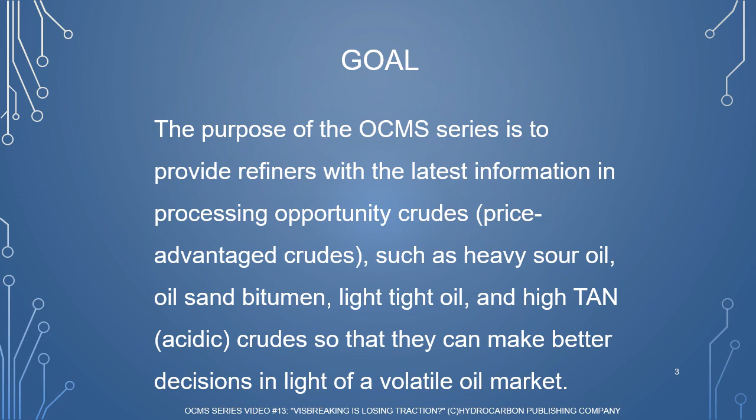Video number 13, Visbreaking is losing traction?

Video number 10, What about Bob? Bottom of the barrel, discuss the various methods to upgrade heavy residue into more desirable products. These methods include traditional means, such as solvent deasphalting or SDA, which we discussed in video number 11, coking, which we discussed in video number 12, Visbreaking, and novel conversion processes such as resid FCC or RFCC, resid hydrotreating, and resid hydrocracking. This video will focus on the Visbreaking process.

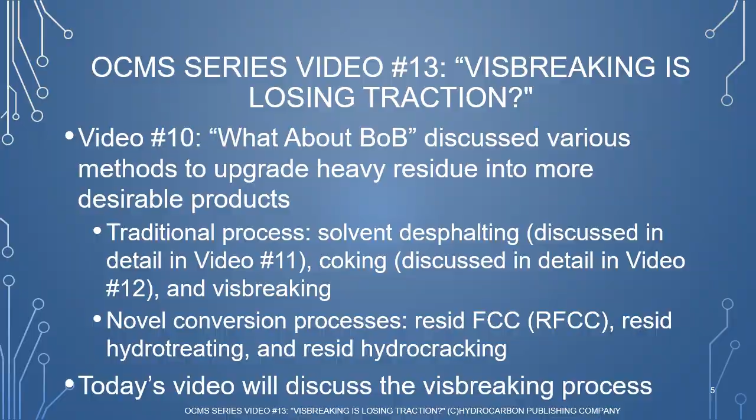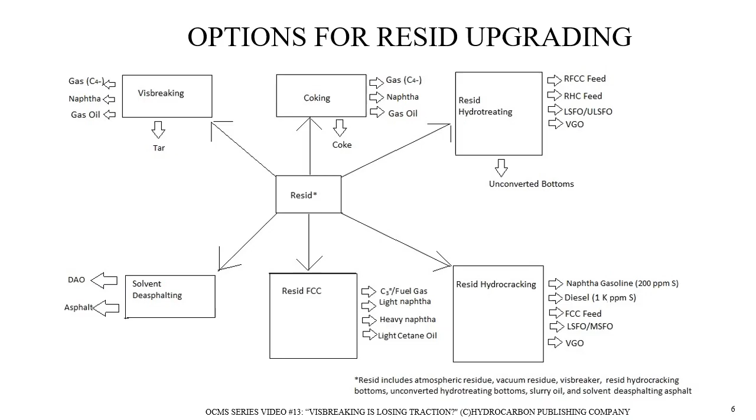This table shows the properties, particularly of the resid fraction, for a number of heavy crude grades from around the world that have API gravities from 10 to 26 degrees. In comparison, conventional crudes such as benchmark Brent of 37 to 39 degrees API and 0.35 to 0.45% sulfur, and West Texas Intermediate or WTI of 39.1 degrees API and 0.6% sulfur, have only 9 to 11 volume percent and 6 volume percent of resid respectively.

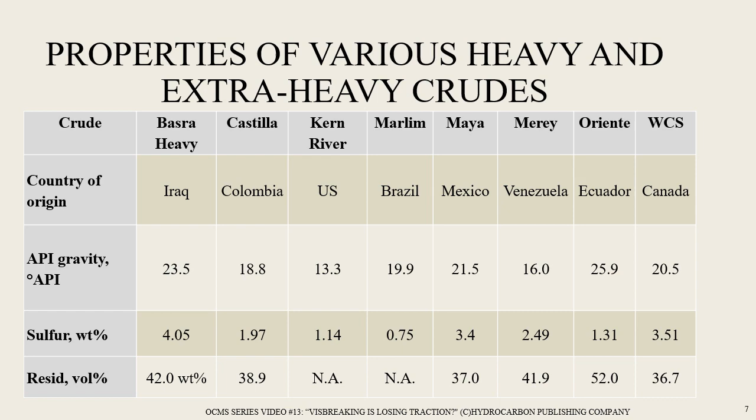Recent and upcoming mandates have led to a decrease in the demand for heavy fuel oil. The International Maritime Organization's or IMO 0.1% spec for sulfur for fuel used in ocean-going vessels traveling through dedicated emissions-controlled areas has reduced the demand for 1% sulfur fuel oil to the point where the remaining material is simply blended in with the high-sulfur 3.5% bunker pool.

Demand is expected to decrease further when the IMO enacts a 0.5% sulfur content spec in 2020. According to the Executive Vice President for Italian Oil and Gas Group ENI, refiners have two options: either buy low-sulfur feedstock or invest in technologies to convert bottoms into acceptable fuels.

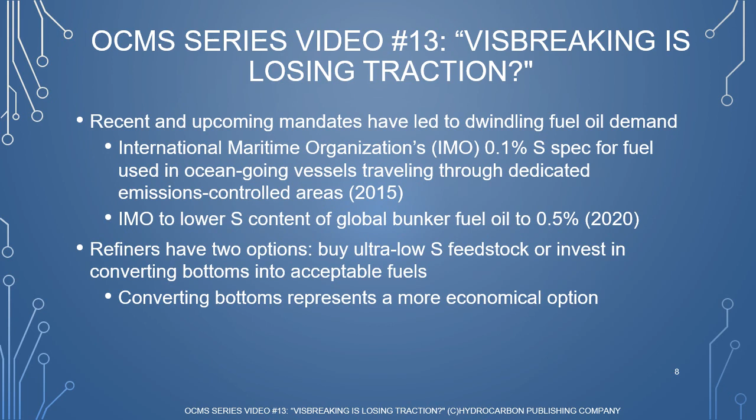The conversion of bottoms is a more economical option, and there are a number of methods to do this. Visbreaking is one of these methods. While Visbreaking is not a popular method nowadays to upgrade bottoms, it does have advantages over other methods.

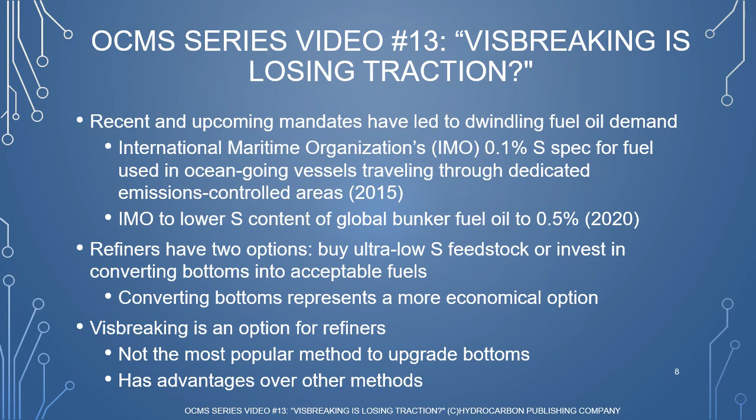This video will discuss Visbreaking in 5 sections. We will first discuss recent news involving Visbreaker additions and trends in global Visbreaker capacity. The video will then discuss some licensed Visbreaker technologies and some commercial additives and fouling control methods for Visbreakers. The section Plant Operational Experiences with Visbreakers will discuss the benefits of online cleaning to remediate problems, namely fouling and coking, that occur in Visbreaker units. The conclusion will recap the topics of the video and discuss a new potential future use of Visbreakers beyond the refinery.

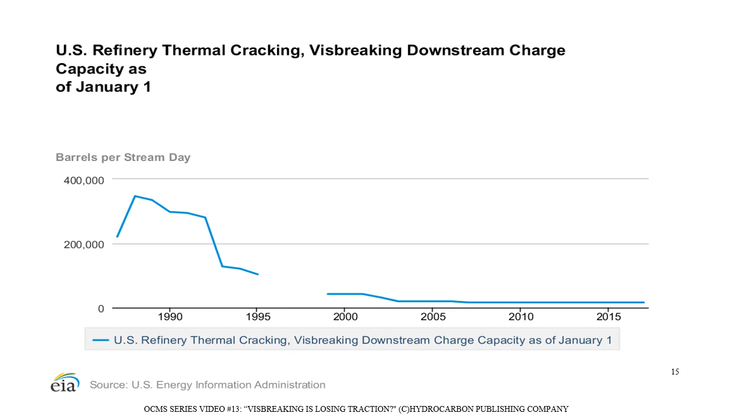In 2018, Polish refiner PKN Orlen announced plans to build a new visbreaking unit at its 330,000 barrel per day Plock refinery. PKN Orlen said the new visbreaker will boost distillates output by 1.2 thousand metric tons per day, or 9,000 barrels per day, while reducing high sulfur fuel oil output. The new unit is expected to be online by the end of 2020, which would help the refiner comply with the International Maritime Organization's new sulfur spec.

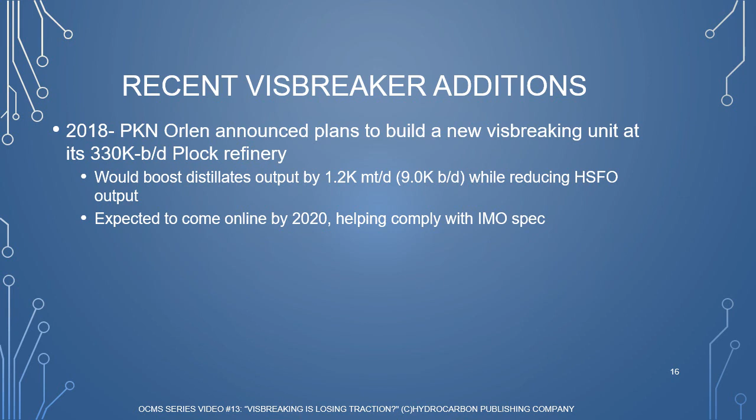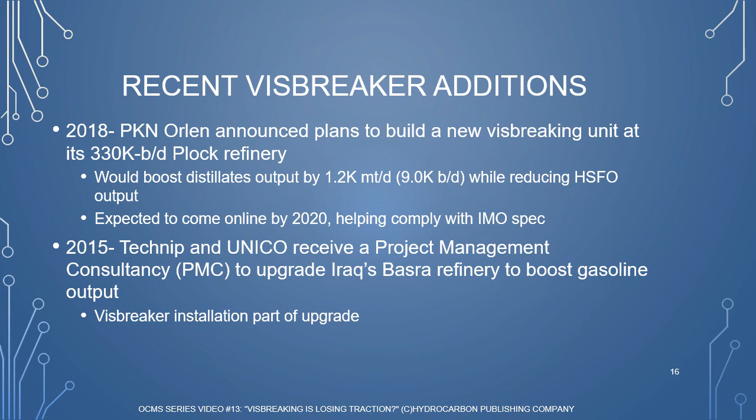In 2015, Paris-based Technip and Japanese engineering consultancy UNICO received a project management consultancy to upgrade Iraq's Basra refinery to boost gasoline output. Part of the upgrade includes visbreaker installation. Also in 2015, Russian Rosneft installed visbreaker capacity in its Kuybyshevsky refinery.

According to OPEC's World Oil Outlook 2017, over 11 million barrels per day of secondary refinery unit capacity, which includes visbreaking, will be added around the globe from 2017 to 2022. Most of this new capacity will be centered in Asia Pacific, the Middle East, and Russia, where growing demand and the introduction of tighter fuel standards are driving investments in secondary unit capacity. Over 1 million barrels per day of coking and visbreaking capacity will also be added, with the new IMO spec also being the main driver.

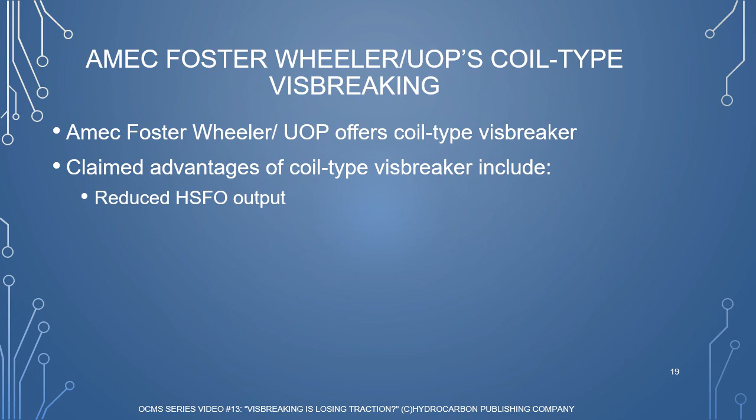Amec Foster Wheeler UOP offers its coil-type visbreaking process. Their coil-type visbreaker has been claimed to have the following advantages: reduced high-sulfur fuel oil output, a reduction in distillate cutter stock requirements which makes the distillate available for sale as more valuable transportation fuels, a low cost to upgrade, and simpler maintenance and decoking compared to soaker visbreaker designs.

These coil-type visbreakers can be integrated with vacuum units to eliminate redundant equipment and reduce installation costs. This type of integration was evaluated for a Russian refinery designed to operate a new vacuum unit along with a visbreaking unit.

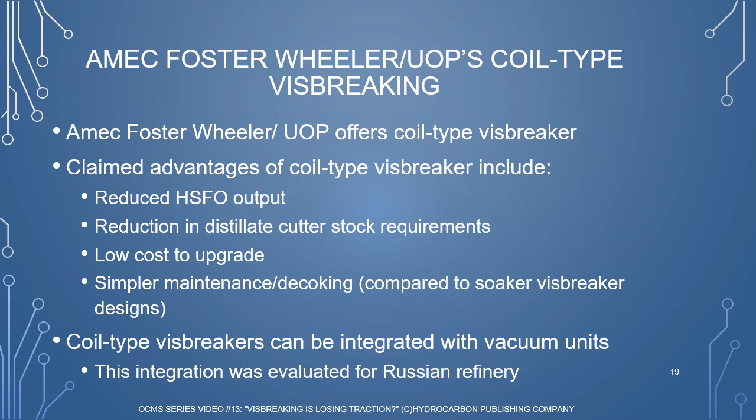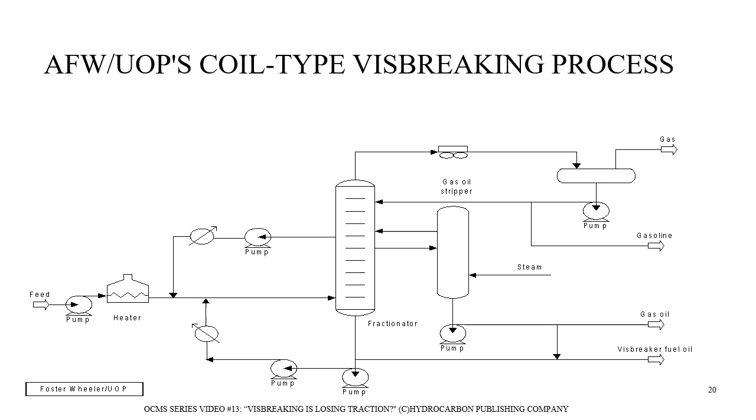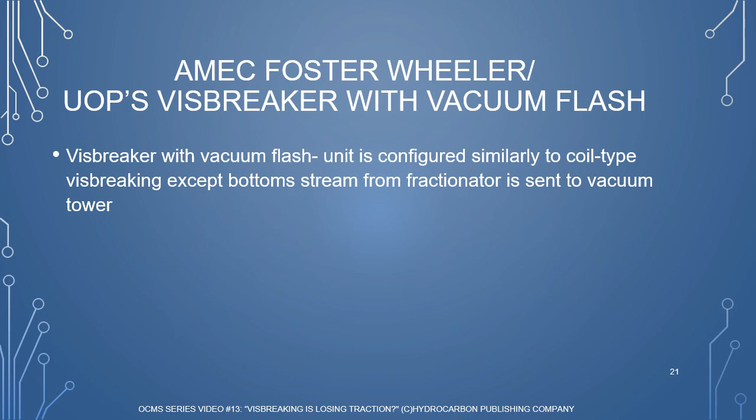Amec Foster Wheeler UOP also offers visbreaker with vacuum flash. In this option, the visbreaking unit is configured in the same way as the basic coil visbreaker, except that the bottom stream from the fractionator is sent to a vacuum tower. The liquid that exits from the bottom of this tower is steam stripped, while the vapor overhead is partially condensed into distillate products that can be processed to transportation fuels.

Heavy vacuum gas oil and light vacuum gas oil side streams are removed from the column and combined. Part of the combined vacuum gas oil product is used for fuel oil viscosity reduction, while the remaining portion is utilized as cracker feedstock.

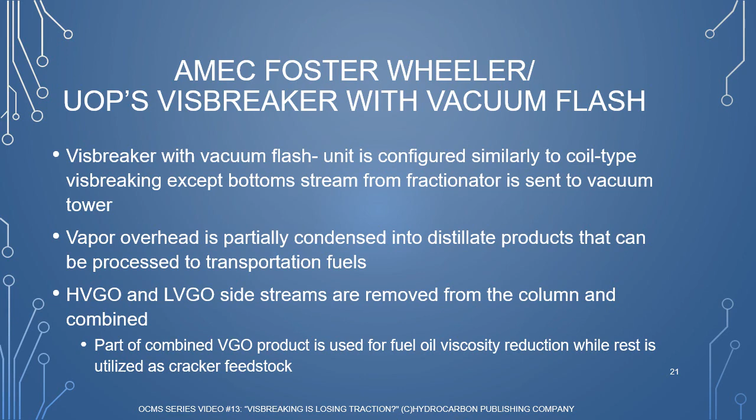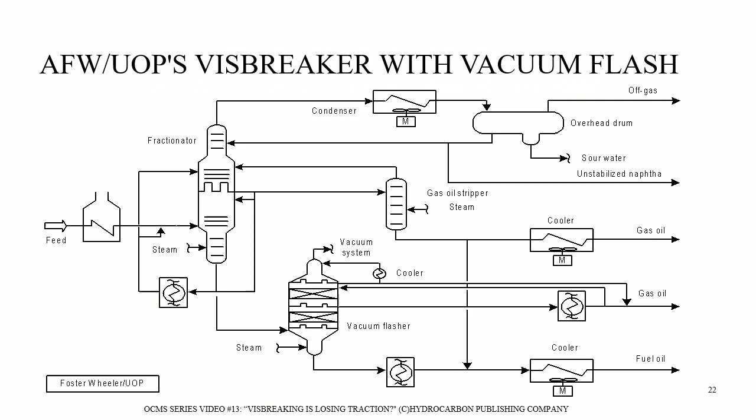This process diagram depicts Amec Foster Wheeler UOP's Visbreaker with vacuum flash. Amec Foster Wheeler UOP's two-stage Visbreaker is similar to the Visbreaker with vacuum flash, except that the combined gas-oil stream is sent to a thermal cracker before being routed back to the fractionator.

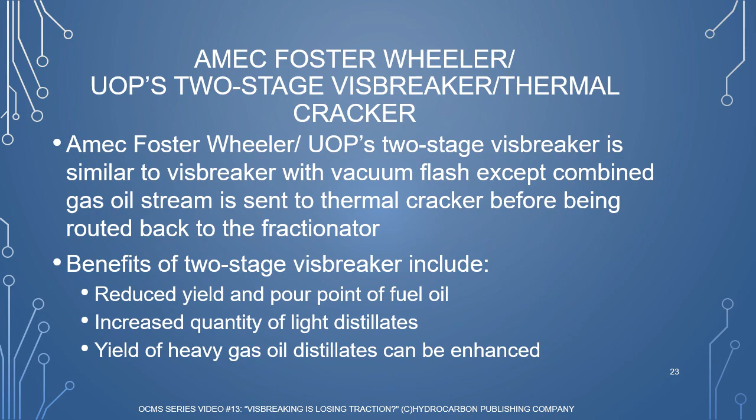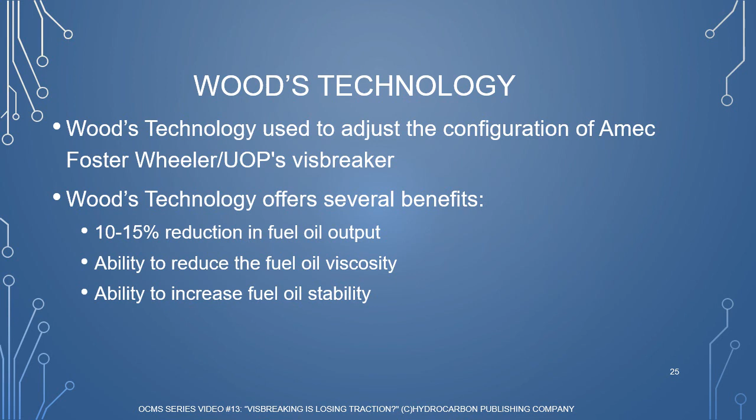Another innovation available to adjust the configuration of Amec Foster Wheeler UOP's Visbreaker offerings is Wood's technology. According to Amec Foster Wheeler, Wood's process offers several benefits, including a 10 to 15% reduction in fuel oil output, the ability to reduce the fuel oil viscosity and increase fuel oil stability by blending light and/or heavy cycle oil into the Visbreaking residue, and the production of higher quality high vacuum gas oil feed for FCCUs and hydrocrackers compared to Visbreaking with a vacuum flasher.

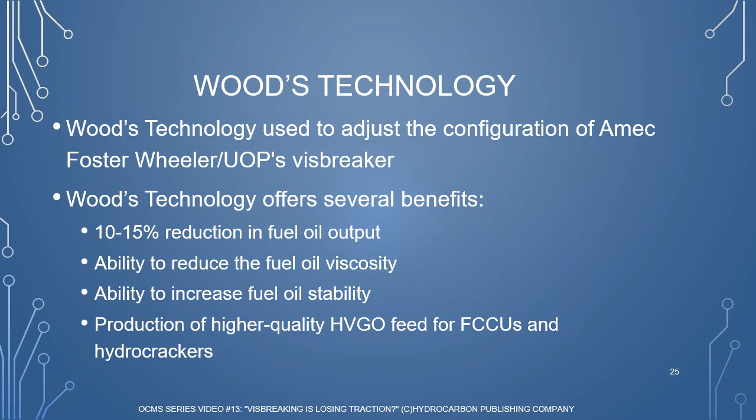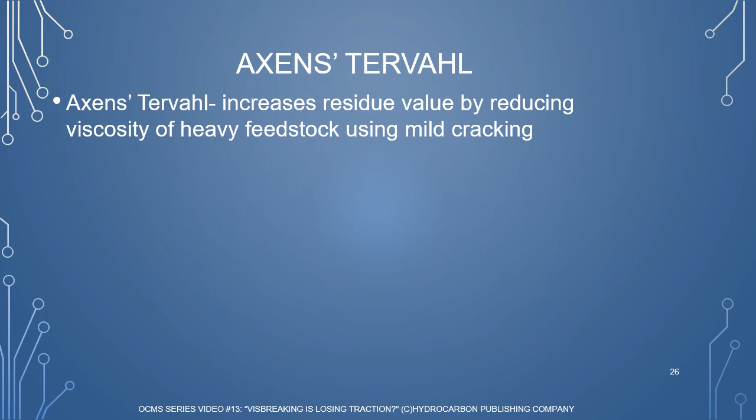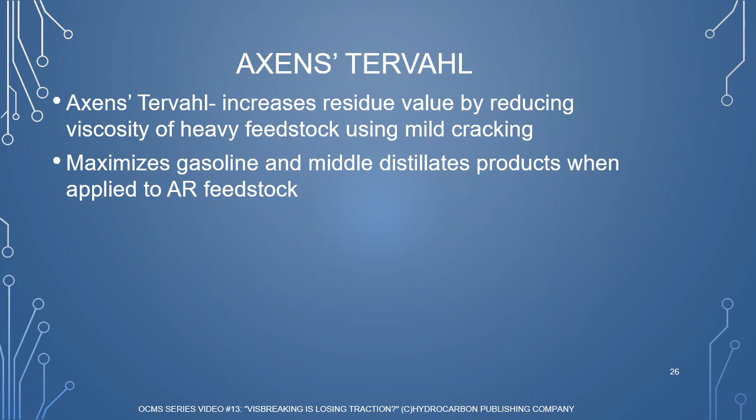Axens' proprietary Visbreaking technology is called Tervahl. In general, this process increases the residue value by reducing the viscosity of the heavy feedstock by mild cracking. Tervahl maximizes gasoline and middle distillate products when applied to atmospheric residue feedstocks, with consideration for the residual fuel oil specifications for viscosity and stability. When the feedstock is a vacuum residue, the process is applied to drastically reduce the viscosity to produce commercial fuel oils, with the addition of a light diluent, if needed.

Axens offers three variations of its Tervahl process: Tervahl T, Tervahl H hydro Visbreaking process, and Tervahl C.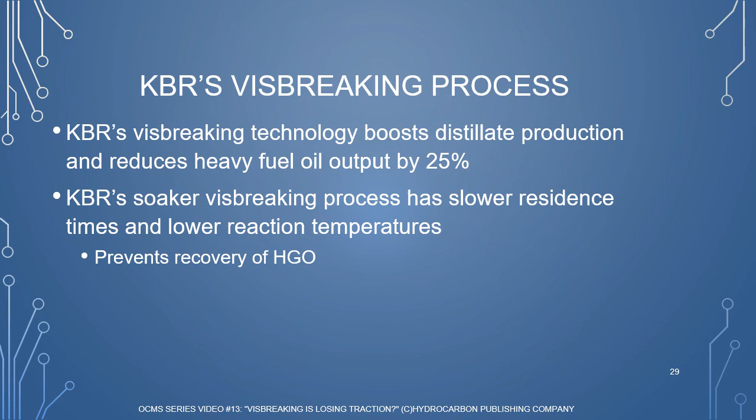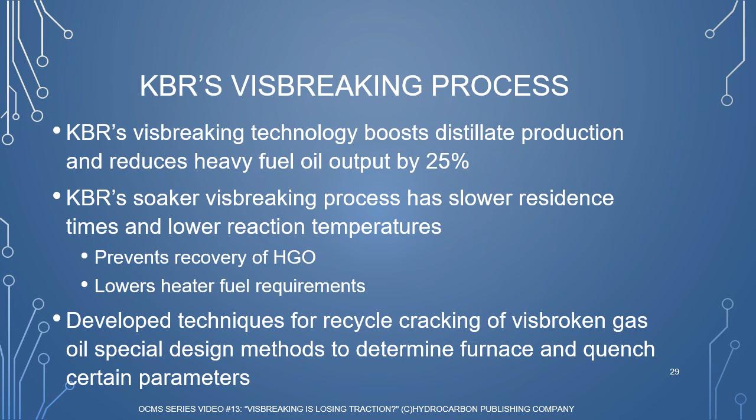In addition, the company has developed techniques for recycle cracking of visbroken gas oil and special design methods to determine furnace and quench parameters such as cracking severity and soaking coil volume. This diagram depicts KBR's Visbreaking process.

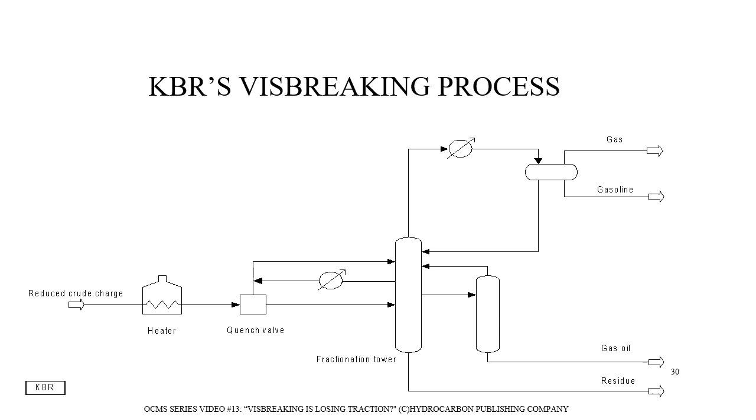ABB Lummus Global licenses Shell Thermal Conversion Technologies, which includes Shell Soaker Visbreaking technology, Shell Deep Thermal Conversion, Shell Thermal Gas Oil Process, and Shell Deep Thermal Gas Oil Process. Additionally, Shell Vacuum Flash technology can be added to Visbreakers for additional benefits.

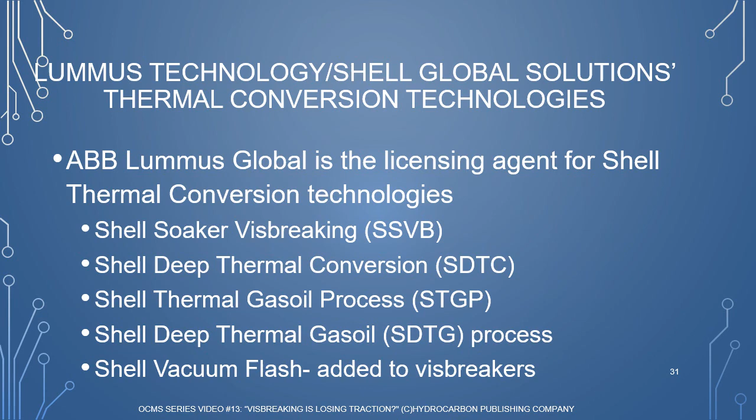The goals of the Shell Soaker Visbreaking technology process are to reduce the heavy oil product by lowering the viscosity of the resid and to maximize production of distillates.

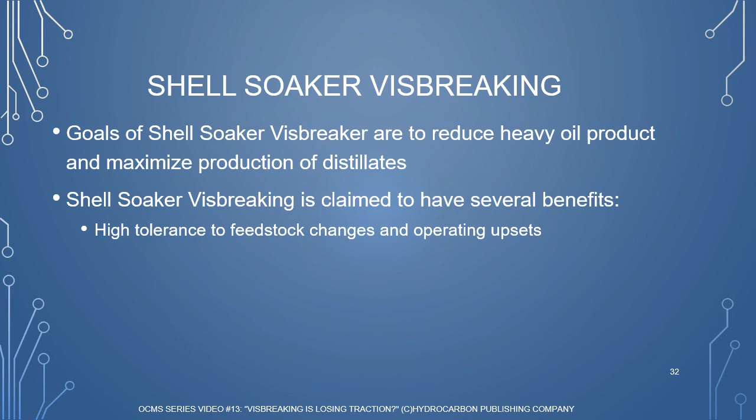The company claims the technology has the following benefits: high tolerance to feedstock changes and operating upsets, enhanced process control, extended heater run lengths, faster turnarounds, and lower power requirements due to the low pressure drop in the heater and generally mild operating conditions.

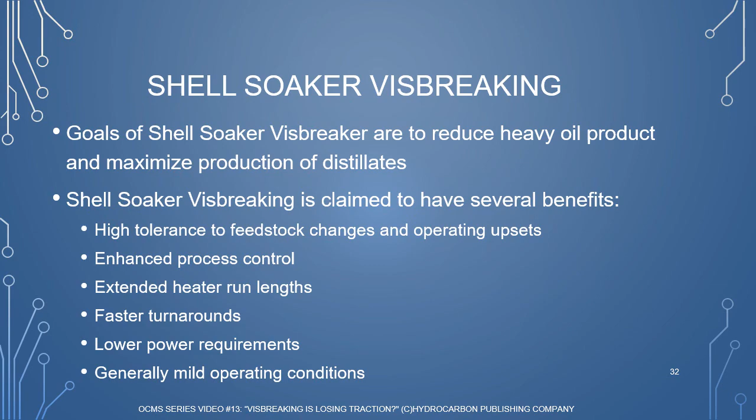In the Shell Deep Thermal Conversion process, the bottom stream from a vacuum flasher can be obtained and used as gasifier feed. There are a number of additional benefits according to the company.

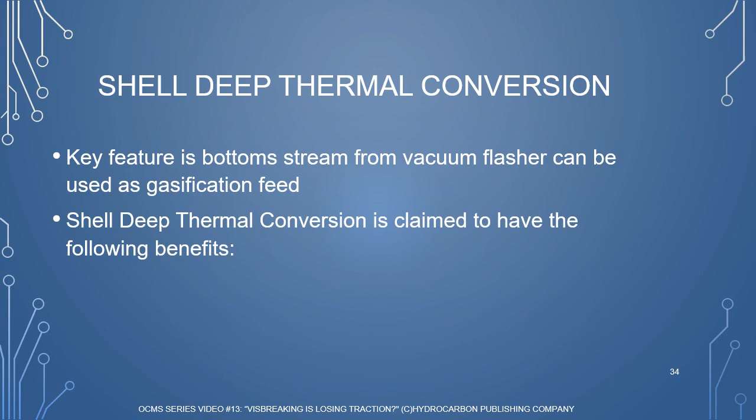The process does not require a coke handling system. Also, Shell Deep Thermal Conversion process utilizes the hydrogen in the feed to produce higher quality distillates than the products obtained from delayed coking.

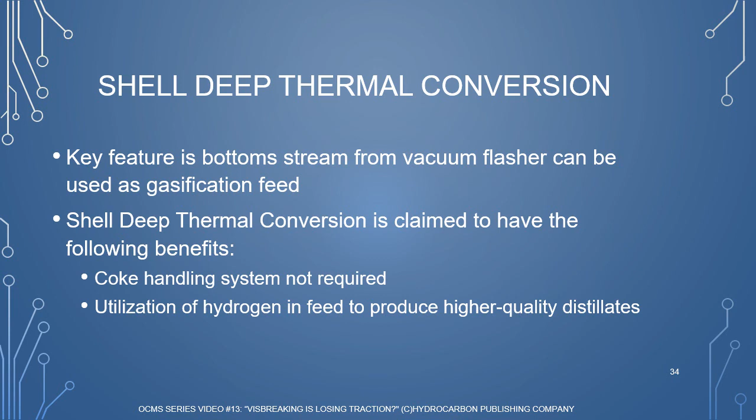Finally, the distillate yield from this process, which ranges from 45 to 60 weight%, is higher than that from traditional soaker visbreaking due to the conversion achieved and the use of the vacuum flasher.

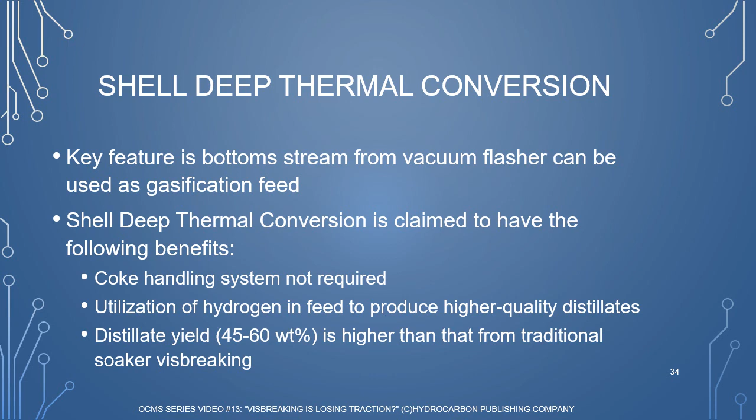This diagram depicts the Shell deep thermal conversion process.

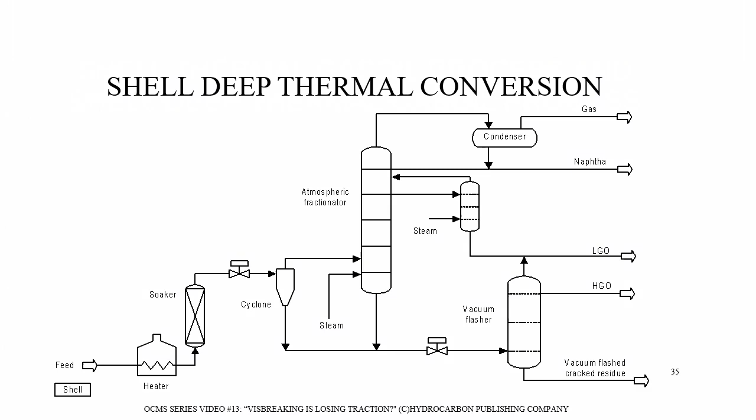Shell offers both the thermal gas oil process and deep thermal gas oil process. In Shell's thermal gas oil process, the company's patented soaker visbreaking, vacuum flashing, and thermal cracking are utilized to yield distillates. Also, the cracked residue stream that exits the bottom of the vacuum flasher is commonly used to produce commercial fuel oil.

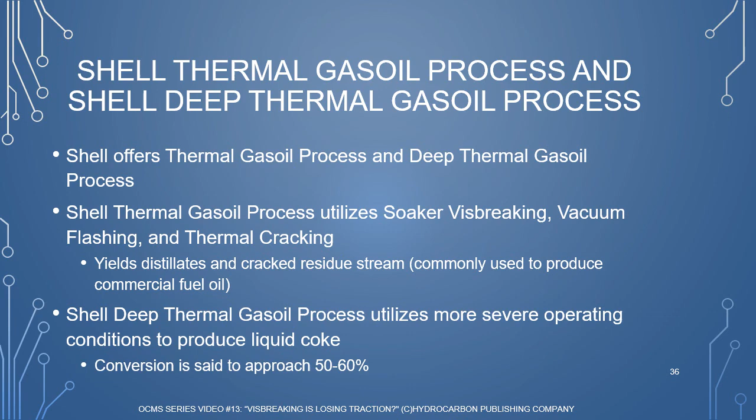Baker Hughes VisTec program includes two methods for reliable assessment of visbreaker tar stability for fouling control. The VisTec Stability Index provides results that are more accurate by relying on a near-infrared-based probe instead of operator judgment. The patented VisTec Coke Index is calculated using a coke particle counter sizer and provides a measurement of the tendency for coking to occur in the furnace.

Additionally, proprietary chemical additives can be applied to mitigate the feed-based constraints of the unit, particularly when operating severity is increased in an attempt to increase conversion. These chemical additives include asphaltene dispersants, asphaltene stabilizers, and coke suppressants.

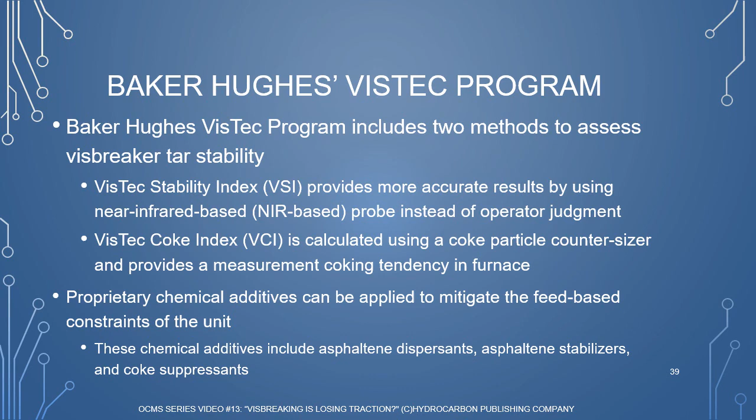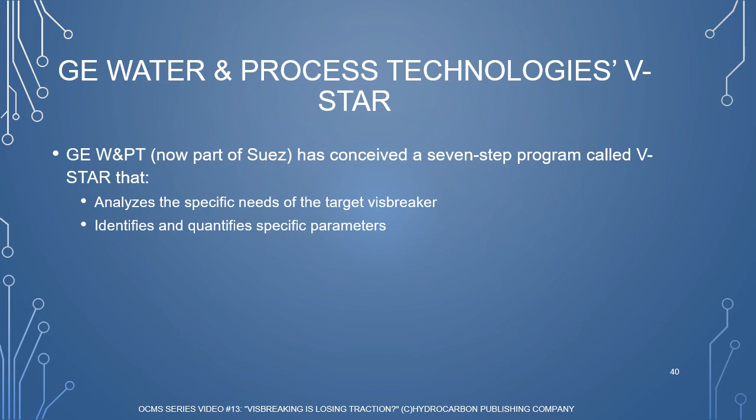GE Infrastructure Water and Process Technologies, now a part of Suez, has conceived a 7-step program called V-STAR. The program analyzes the specific needs of the target visbreaker, identifies and quantifies specific parameters, determines the objectives to be met, and monitors to provide parameter adjustments as needed.

Also, chemical additives are applied to limit fouling and improve operations. The tools of the program include modeling and regression analysis and statistical process control.

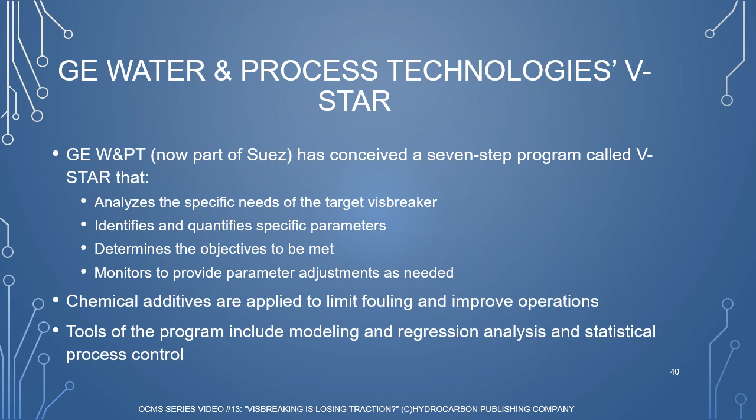Nalco Champion has developed the Conversion Plus 2 programs so that refiners can safely monitor and control fouling in visbreaker units in order to optimize unit severity and, accordingly, maximize conversion.

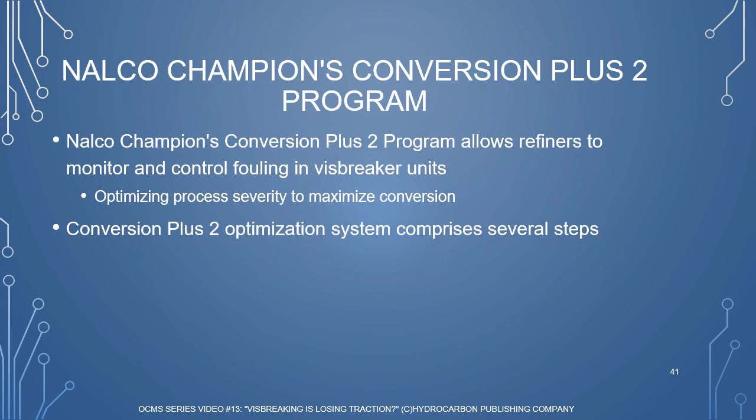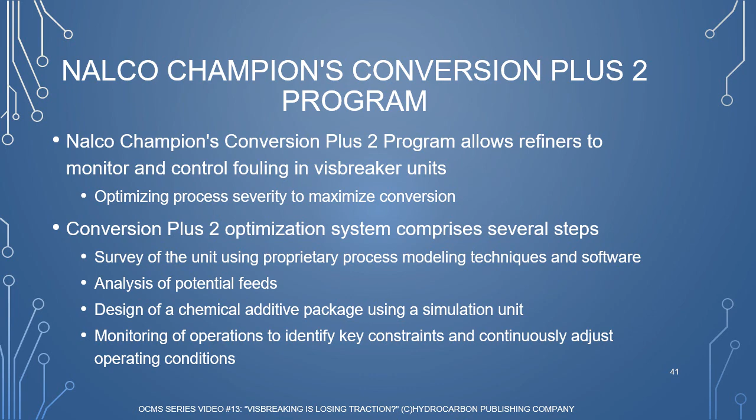The Conversion Plus 2 optimization system comprises the steps of surveying the visbreaker unit, analyzing potential feeds, designing a chemical additive package using a simulation unit, and monitoring operations to identify key constraints and continuously adjust operating conditions.

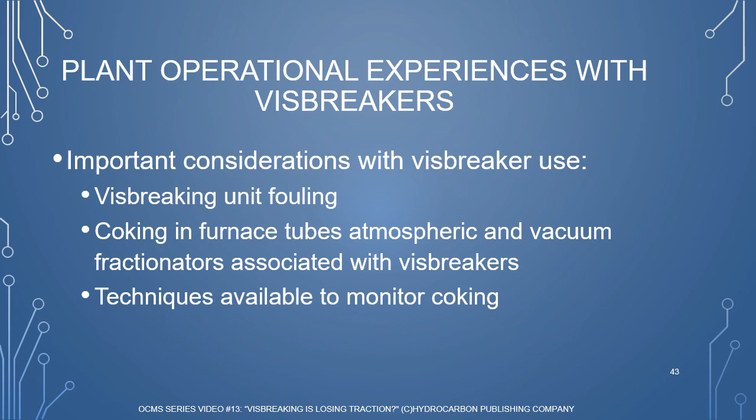There are important considerations when using visbreaker units, mainly fouling and coking in furnace tubes and atmospheric and vacuum fractionators associated with visbreaker units. While there are techniques to monitor coke formation in visbreaker units, the best practice is to regularly clean the units to remove coke. In this video, we will discuss online cleaning of visbreaker units.

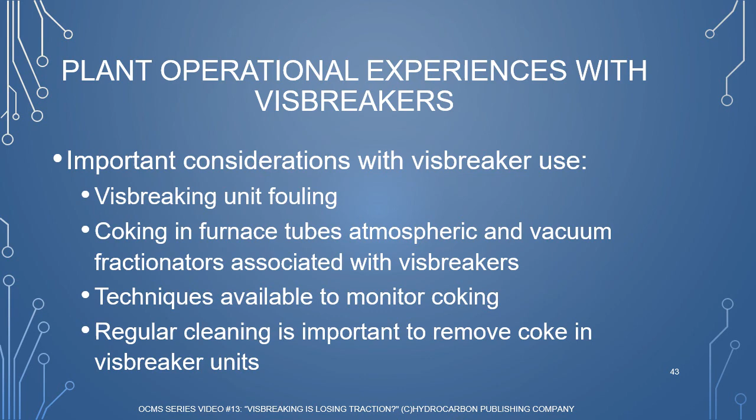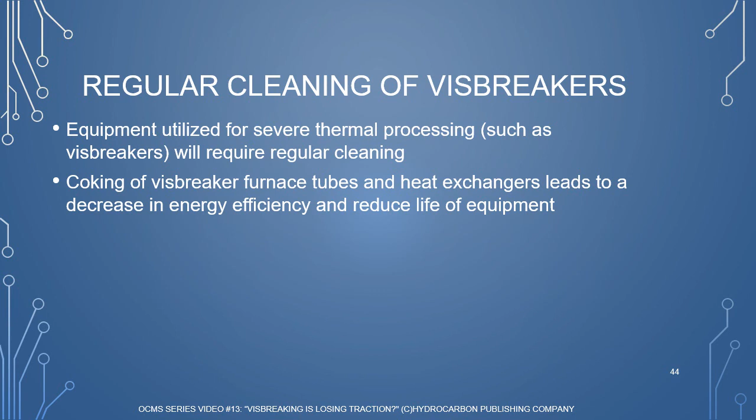Regardless of the steps taken to limit the rate of fouling and extend heater run lengths, equipment utilized for severe thermal processing will require regular cleaning. Coking of visbreaker furnace tubes and heat exchangers leads to a decrease in energy efficiency and may also reduce the life of the equipment. However, the economic losses due to increased fuel consumption are dwarfed by those related to frequent and extended unit shutdowns that result in a loss of throughput.

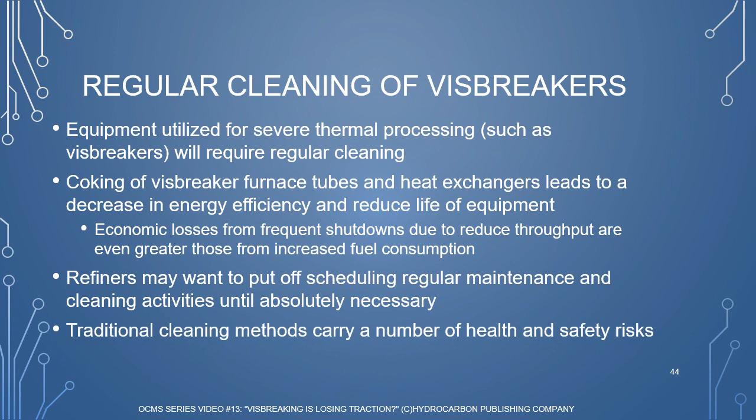As a result, refiners will often put off scheduling regular maintenance and cleaning activities until absolutely necessary, sacrificing some level of efficiency to keep the unit on stream as long as possible. Also, traditional cleaning methods carry a number of health and safety risks for refinery workers, and the physical removal of coke can result in the release of harmful particulates to the atmosphere.

In many cases, online cleaning is implemented when traditional cleaning methods are ineffective. However, these methods may also be applied during more traditional turnarounds to hasten cleaning activities. Online cleaning reduces the problem of refinery workers being exposed to hazardous conditions, and eliminates other potential problems associated with the physical cleaning of refinery equipment.

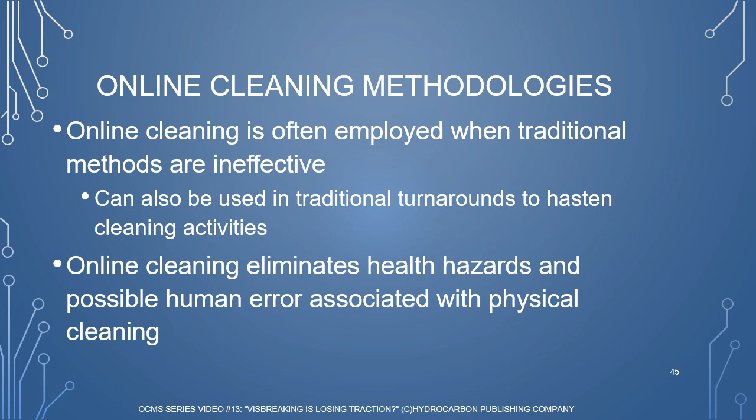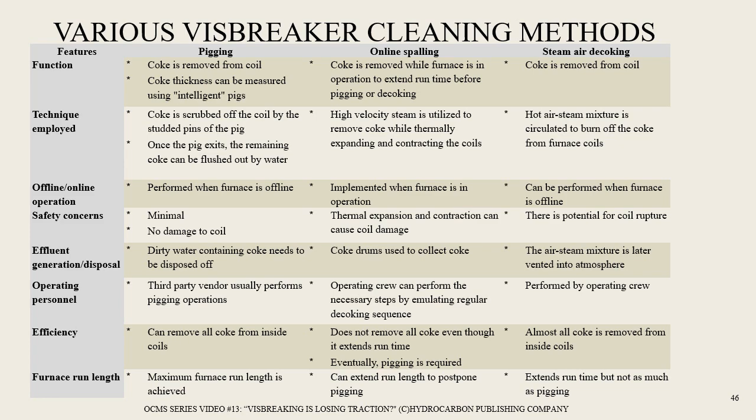This table shows the advantages and disadvantages of both the offline and online methodologies of spalling and pigging.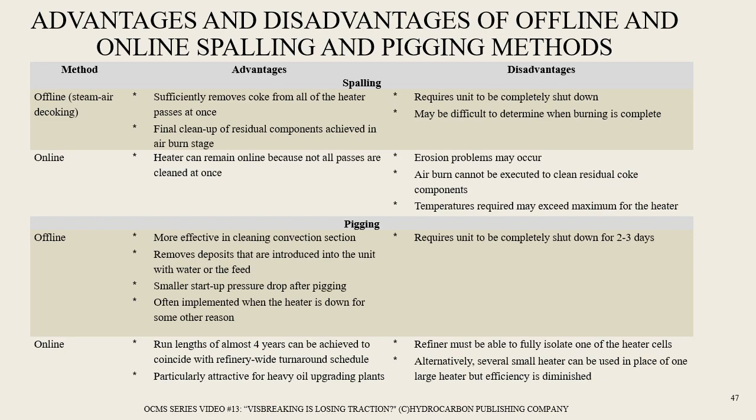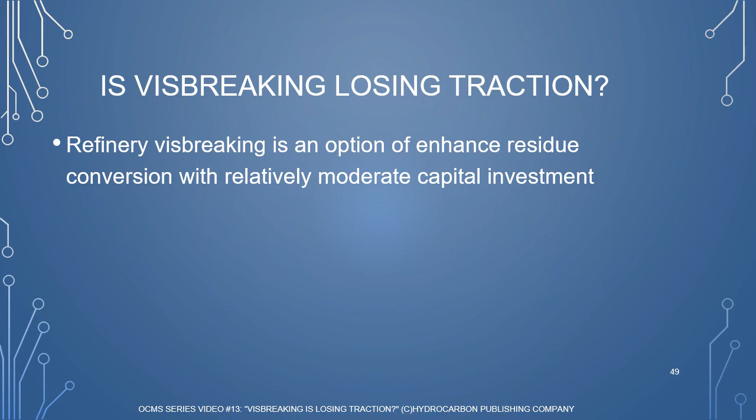Refinery visbreaking offers refiners an option to enhance residue conversion with moderate capital investment compared to alternative conversion processes. However, with the growing demand for lighter products and subsiding demand for fuel oil, the role of the visbreaker in a refinery has been minimized. IMO's new sulfur regulations and competition from other sources of fuel such as diesel and liquefied natural gas further decrease demand for fuel oil, casting even more doubt over the future viability of the visbreaker.

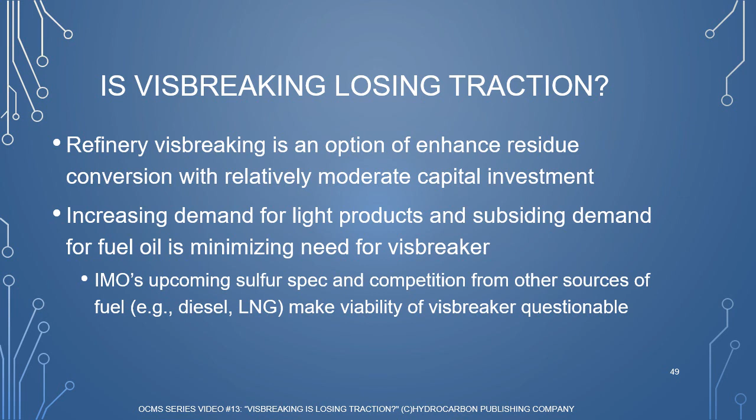In fact, the past 5 years have seen a trend of decreasing visbreaking capacity as refiners look for other residue upgrading methods. While refiners may be interested in more profitable residue upgrading methods, integrated processing schemes, optimization, hardware, and fouling control including the use of chemical additives are all available to enhance the profitability of the visbreaking unit.

Additionally, while the visbreaker may be falling out of favor within a refinery environment, it may see some new applications in being applied for in situ upgrading of very heavy crudes at upstream oil fields such as those in the Canadian oil sands and in the Orinoco Belt in Venezuela. In fact, recent research has looked into new visbreaking innovations designed for in situ upgrading of heavy crude right at the production field. So while downstream refining applications of visbreaking may be dwindling, the technology may find some renewed life in upstream projects.